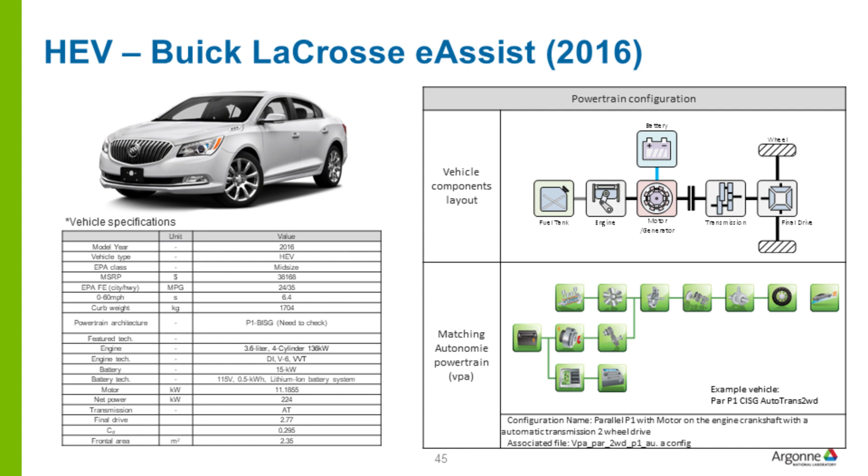Starting in the early 2000s, vehicles started becoming far more complex with the introduction of hybrid powertrains. Vehicles with many different architectures and degrees of hybridization were released to the market that are still being manufactured today. These include micro-hybrids, integrated starter alternator hybrids, and full hybrids, such as the power split used by the Toyota Prius.

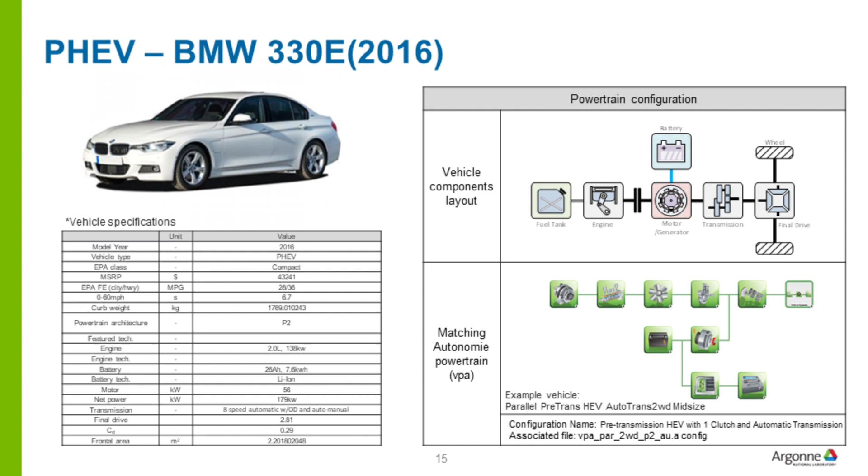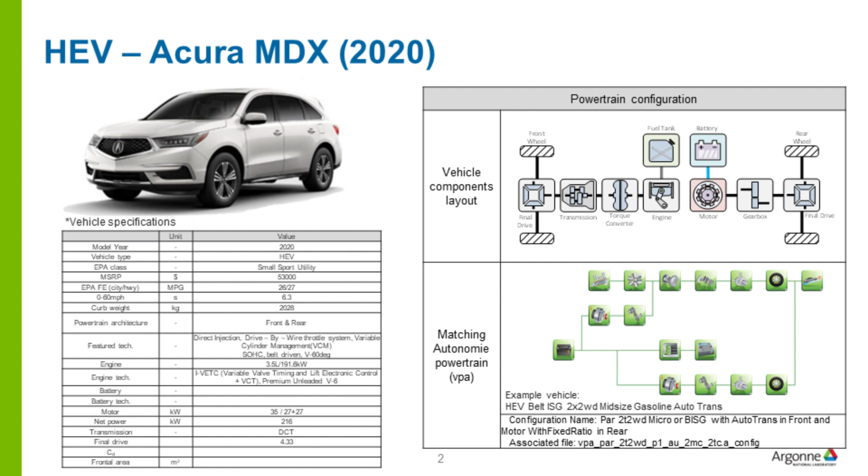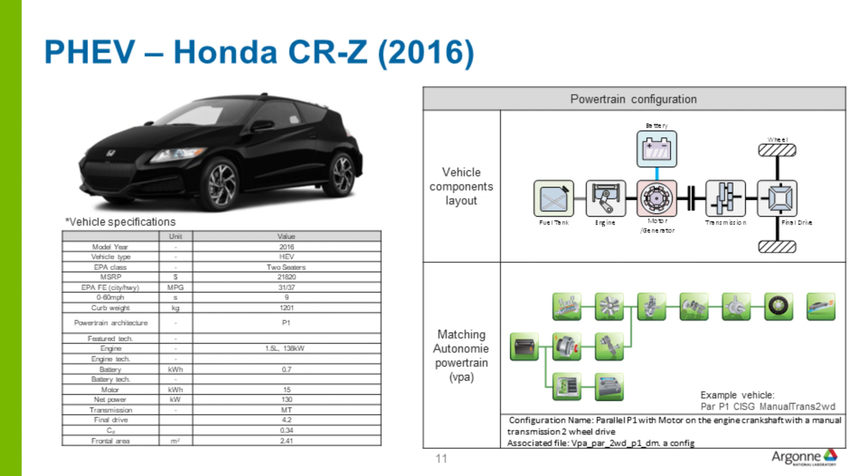But there are many other different architectures, such as pre-transmission hybrids or series architectures, series parallel architectures. So there are many different types of powertrain architectures because there's many different places that you could couple a motor to a drive shaft, and there are many places that you can integrate an electric machine within a transmission, and the number of electric machines might vary.

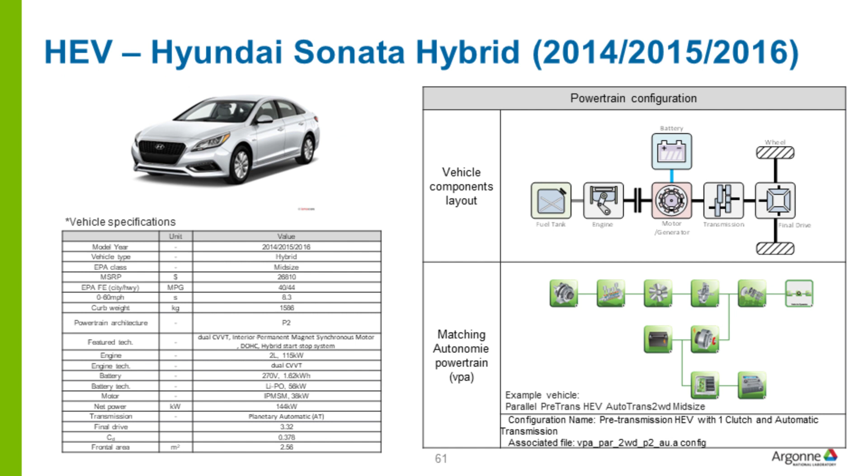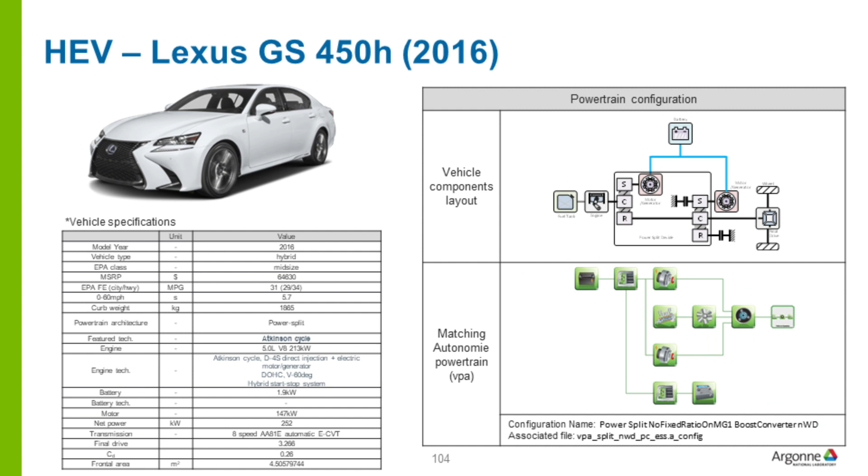So you might have it with the engine, you might have it before the transmission, you might have a motor after the transmission, you might have motors connected to the wheels or many other places within the powertrain. So there are many options in terms of hybrid architectures. And then you can also add other technologies to that.

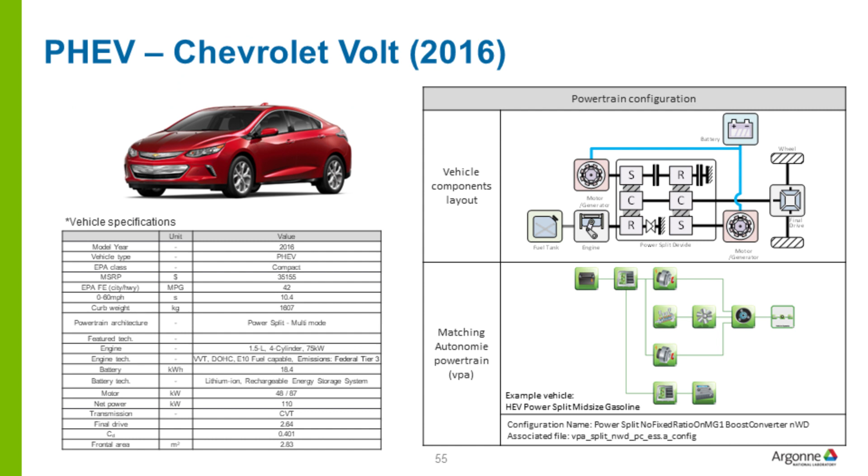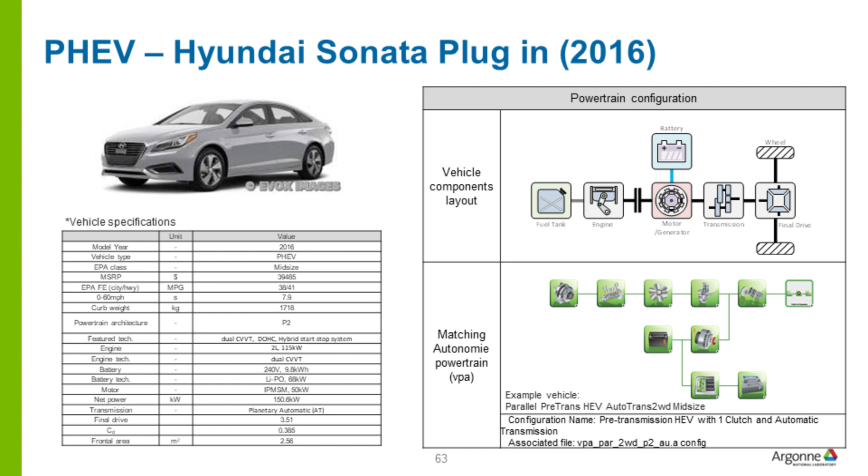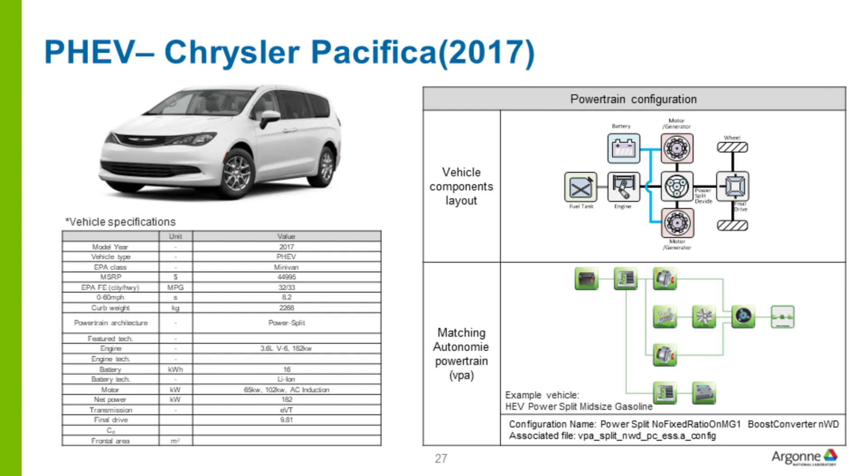So, in the teens, as battery technology had matured enough, plug-in hybrid vehicles started becoming popular, where you had the option of charging the vehicle and having an all-electric range. And then after the introduction of plug-in hybrid vehicles, battery technology continued to improve, and then we started seeing fully electric vehicles coming to the market. So these vehicles had ranges within the reason in which consumers would accept.

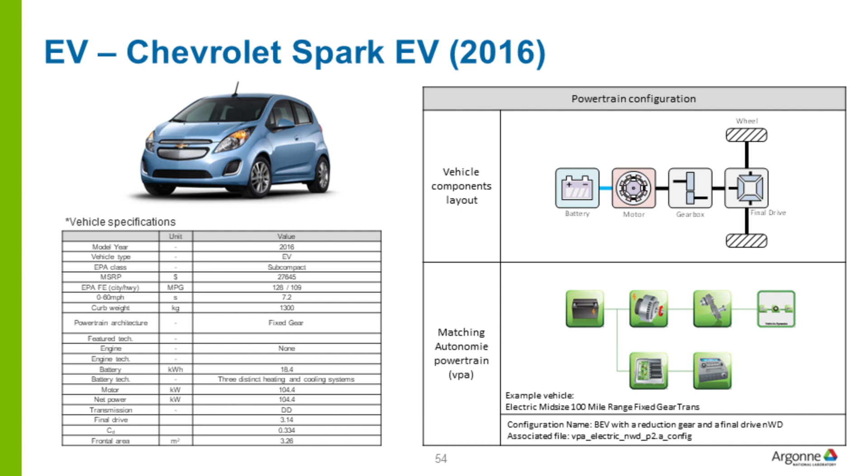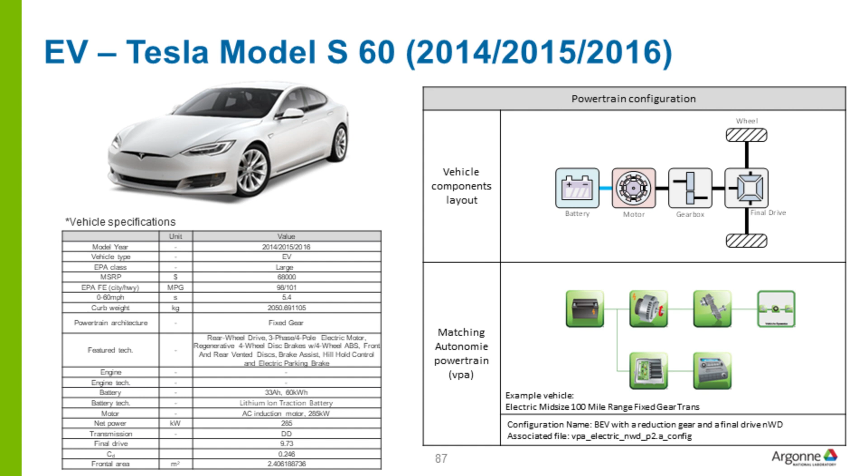And then finally, in the late teens and the early 2020s, connected and automated vehicle technologies began being deployed. These technologies included vehicles with different levels of automated driving or automation. And then also you'd start to see the introduction of vehicle to vehicle communication, vehicle to infrastructure communication, in which the vehicle might receive information from the traffic lights so that it can know when a traffic light is going to change color, so you can implement strategies such as eco approach.

So over the last 20 years, transportation has become far more complex with the advent of all these different technologies, both on the powertrain level and the vehicle level, but also now the intelligence that's being added to vehicles and the intelligence that's being added to roadways. So because of that, that drives the necessity to have new types of tools that are able to answer questions.

So originally you could evaluate a vehicle on certification cycles, so a city or highway cycle, and get a good idea of the fuel economy for the vehicle and what potential energy savings there would be in the future. But now you have to simulate an entire urban area to get an idea of what impact some of these new technologies will have. So you can ask questions such as what fuel economy and energy savings is possible with connected and automated vehicles. And then you can ask that question as the level of automation changes.

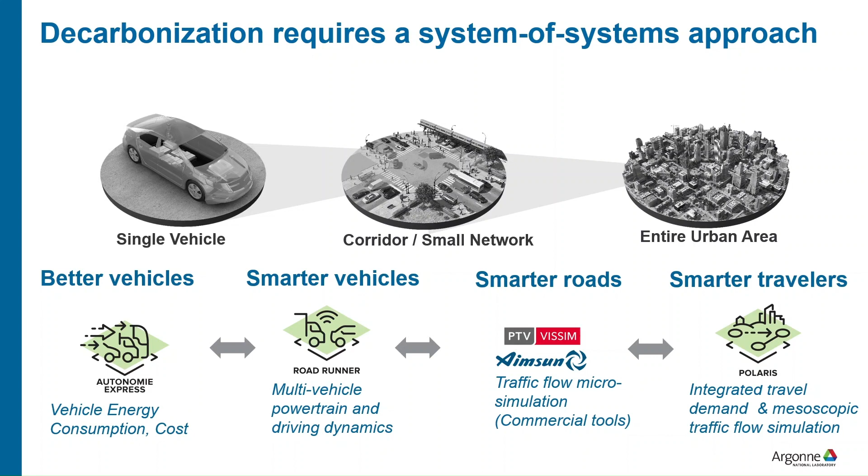So you need a tool such as Autonomie Express that has that level of fidelity that's able to answer those questions. So you could get mesoscopic traffic simulation results, and you could also get those microscopic traffic simulation results across a corridor. So mesoscopic is where you're taking it across an entire city. Microscopic is where you're getting it within a small network of roads or a corridor.

And there are tools that are very good at producing the average traffic speed, the traffic density, and are able to generate those results. So the question though becomes, those tools are very adept at doing that, but you still need to create fuel economy. You still need to create energy consumption.

And to do that though, you need a tool, and that's where Autonomie Express comes in. So Autonomie Express is able to take the results of a traffic simulation tool such as POLARIS, or microscopic traffic simulation tools such as Aimsun, VISSIM, and SUMO, and is able to take the results of those simulation tools and make very accurate energy predictions on those vehicles.

And it's able to do it quickly too. That's the other aspect of it, because you're generating, in some cases, millions of drive cycles. So you want to be able to make predictions as fast as possible. And that's what Autonomie Express allows us to do across many different vehicle types. So HEVs, PHEVs, BEVs, even fuel cell hybrid vehicles.

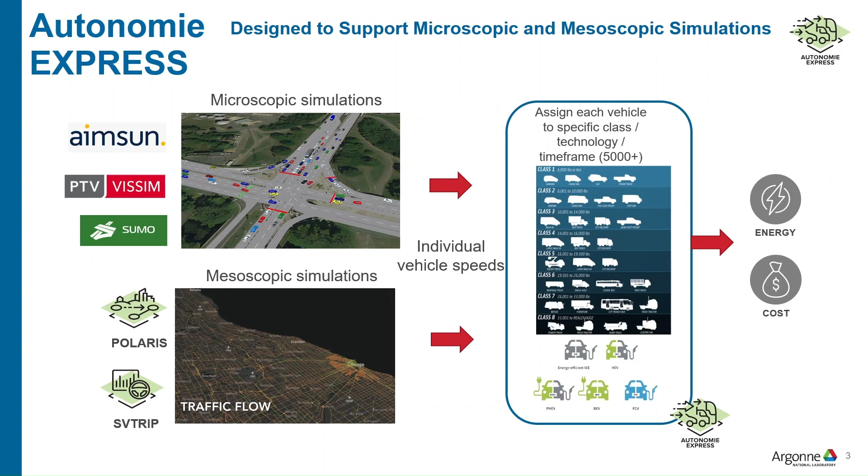And the big advantage of Autonomie Express that allows it to do this and allows it to do it accurately is that it has predefined vehicles, and it has thousands of vehicles, and it covers a wide range of time frames. So you can see that you have vehicles from the past all the way into the future to 2050. You have vehicle types such as from light duty all the way to heavy duty. And then you have many different powertrain types, many of which I've mentioned.

You have conventional, HEV, PHEV, electric, fuel cell. You have all sorts of different fuel types. So you have your diesel and gasoline, but you also have biofuels and natural gas and even hydrogen. And then you have technology. So you have an uncertainty in the technology. So there's certain assumptions being made in terms of how efficiency of components will improve.

And that's where the technology cases come in. So if you have an optimistic case where you have a lot of technology improvement, that's your high case. If you have a more business as usual where there isn't as aggressive improvements in technology, you have your low case. And that allows the prediction of energy consumption, GHGs, with the tool Autonomie Express.

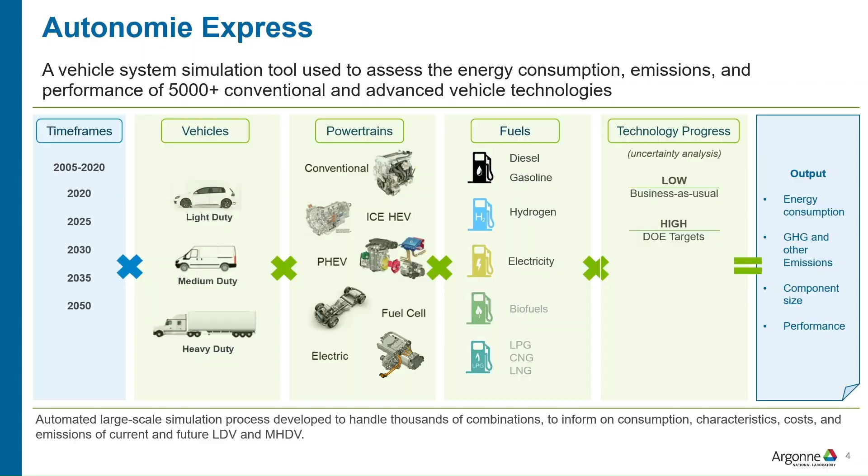Okay, what I'll do next then is start Autonomie Express. So I'll do that by launching Amber 2024. So Autonomie Express is an application that lives within Amber. Amber is the advanced model-based engineering resource. It's a tool that has different applications that live within it and allows us to deploy different tools to end users that include model-based systems engineering applications. So Autonomie Express is one of these applications.

And it has a workflow, so I could go to the Autonomie Express workflow. And that will load. And you can see here, there are the different input file types that Autonomie Express can take. So it could take time-based cycles. So there's some options here for time-based cycles where you have vehicle speed versus time. But it could also take input that is formatted from the SUMO microsimulation tool or the VISSIM microsimulation tool.

It could take input from POLARIS, which is a mesoscopic traffic simulation tool, which models the traffic in an entire city. And then there's Aimsun, which is another microsimulation tool. So if we have VISSIM selected here, the information that appears below it is basically the information that allows one to convert the file type into an Autonomie Express compatible file type.

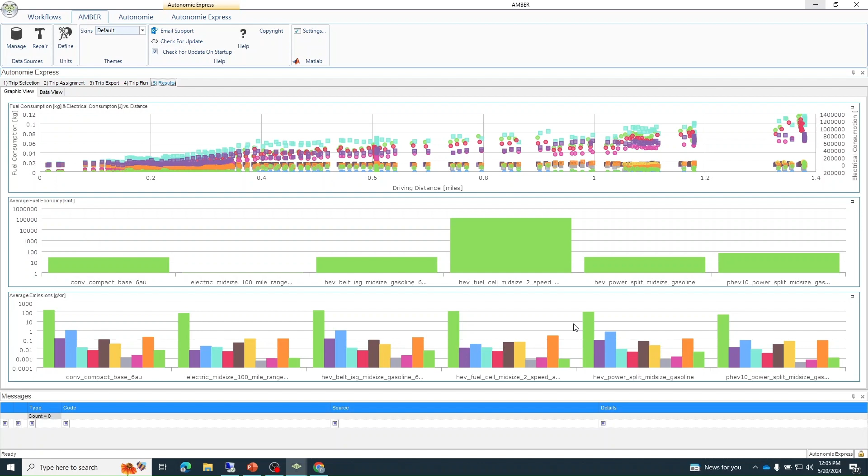If we go to the next tab, we have the data view here. So we have some of the trips. So each trip receives a trip ID. And then you have each characteristic that's being computed by the model. So you have fuel consumption in kilograms per mile, and then you have electrical consumption, the distance driven in miles, fuel economy in kilometers per liter, and then the GHG gases and other criteria pollutants that are produced. And then you have the average and minimum values that are also produced here.

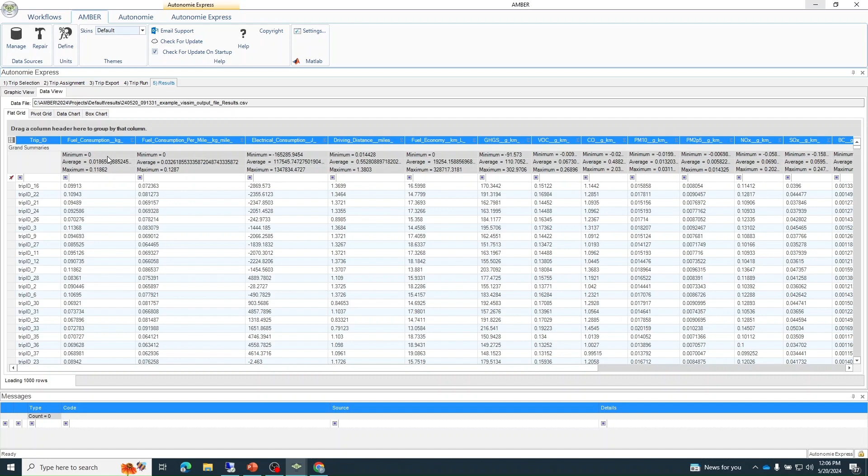You can go to the pivot table. So in the pivot table, what you can do is plot. You have a list of labels. So what I could do is I could say, okay, we have a trip ID. So we assign the trip ID to the rows. We could assign the vehicle name to the columns. And then we could choose a value for each one. So we could look at the greenhouse gas emissions and drop it here for measure.

And then we could expand it. So we could expand it per row, and then we could expand it per column. And then we could see for each trip the vehicle and then the value that it produced for each one of these. So because it's using well-to-wheel values from GREET, even the electric vehicle is producing some greenhouse gas emissions, because that is the greenhouse gas emissions that's created by the production of the electricity.

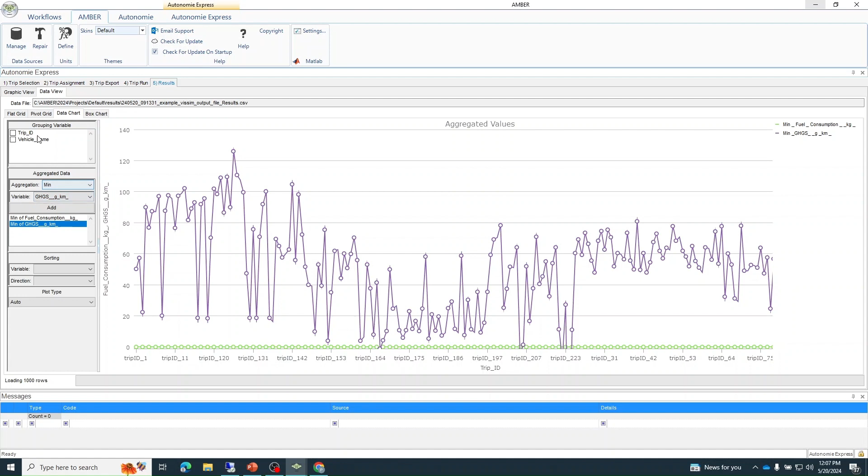So then we can go to some of the other plots. There's this data chart here, and it has various values that you can add. You can group them by trip ID, or you could group it by vehicle name. And there's various values that you can add here in terms of different pollutants or greenhouse gas or the fuel consumption. You can choose the plot type too if you wanted a line graph, or you want it to be columns, which is what we had before. So there's various options here that you could use to view values.

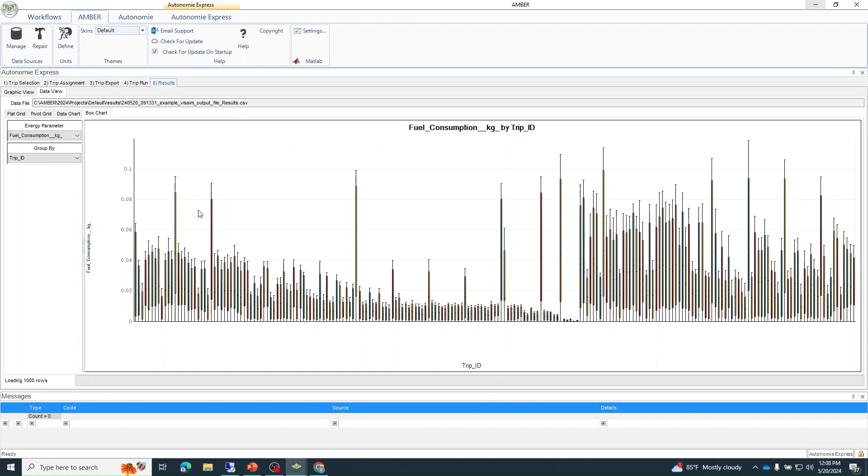And then finally, there's this box chart that shows the various parameters that we have here. So we could show the GHG parameters, or we can show the fuel consumption here in kilograms, and that's showing it for each one of the trips that I have here. And it's showing a max and a min value, and then it's showing an average value. Or you can group it by vehicle name, so you can also see it per vehicle name. So that's the other way that you can view it. So you get max, min, and an average, and then the quartile values that are shown there.

So that gives a good overview, sort of a basic introduction to Autonomie Express and what Autonomie Express is capable of doing. So you can take your traffic flow simulation, such as output from Polaris, or you could take your output from a tool such as VISSIM or Aimsun or SUMO, and then take the results of a micro simulation run, get the traffic flow from that micro simulation run, and then run it through Autonomie Express.

So here we just did a very small subset of results and a small subset of the processing that you can do to just kind of get a feel and an introduction of what the tool is capable of. But this is a great way to add high fidelity energy predictions to your traffic flow results.